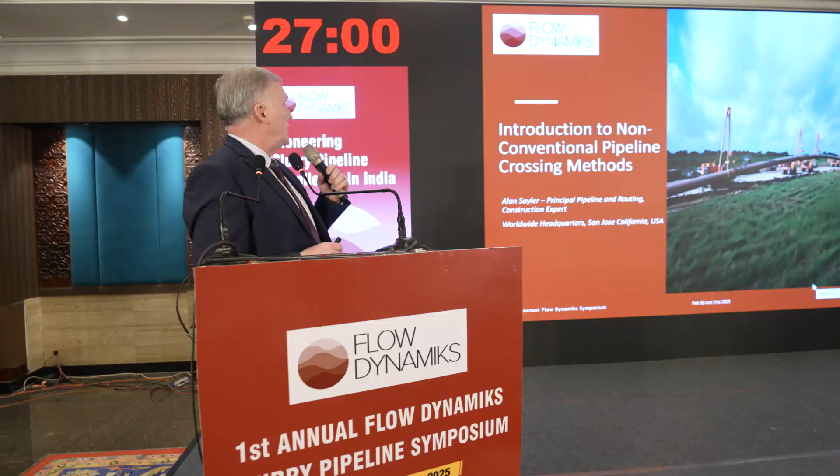Good afternoon, everybody. I know you want to get out of here. I'll try to make this as quick as I can. I'm slated for 27 minutes, I guess.

So I just wanted to share about some crossing methods that are non-conventional to regular normal construction. We have people in here that have been using these methods on their projects. We have people that haven't used them before or don't know about them.

Raj asked me to share about non-conventional construction crossing methods for pipeline installation. I've been doing this kind of work for many years, and really in the industry nothing's changed on how these methods are done, other than HDD and some of the other newer technologies that aren't really being used for slurry pipelines but are being used now. So I just want to go through this and give you an idea of what can be done and what you guys are already doing.

First of all, I'm going to talk about crossings in general and some of the requirements. On a pipeline project, it depends on how long the pipeline actually is. It all depends on how many crossings there will be.

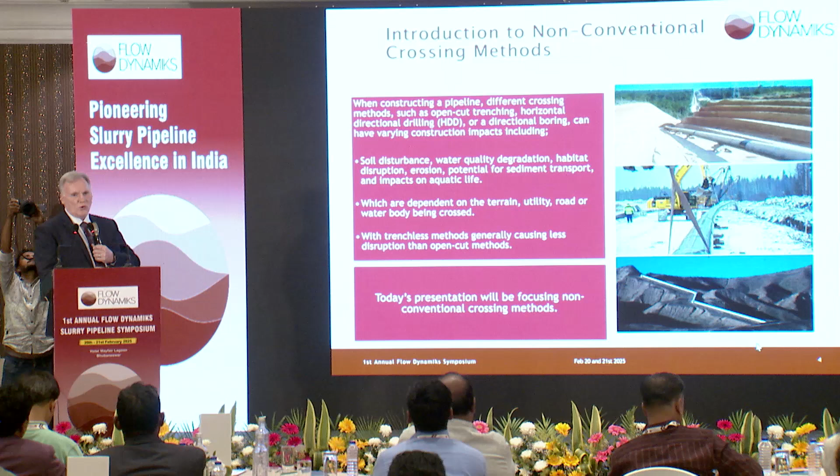The reason non-conventional crossings really came into existence was because of the impacts to the environment and the soil. Different things have evolved with environmentalists. Things have changed drastically on how we install pipelines on crossings.

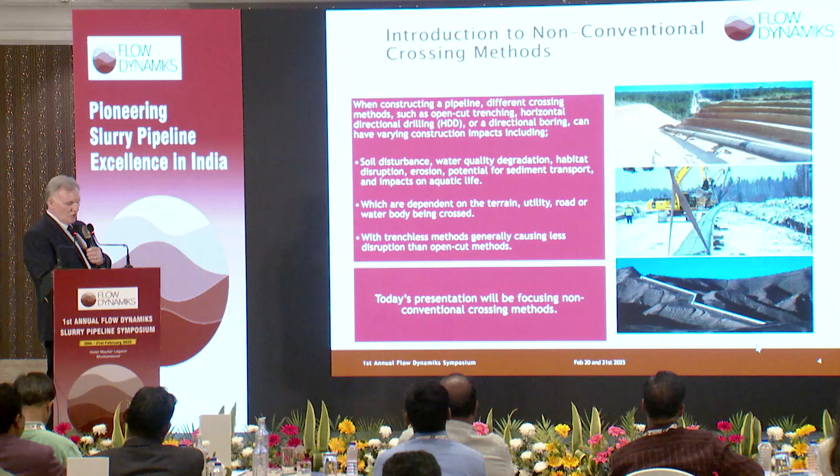Trenchless methods are less invasive compared to the old open cut crossings.

But first of all, on any project, there's a lot of planning, right? So depending on what you're doing, the first thing you want to do is investigate on desktop. I discussed this a couple years ago about investigating your project, but you have to understand your crossings. You have to get a number or list of crossings. You have to understand what they require, whether they require permits, what kind of roads they are, what kind of load restrictions are on them.

And the design is critical. Also, get out and do the survey of these crossings for elevations and profiles. Definitely the geotechnical information should be obtained before construction starts to understand what kind of problems you're going to have with construction installation.

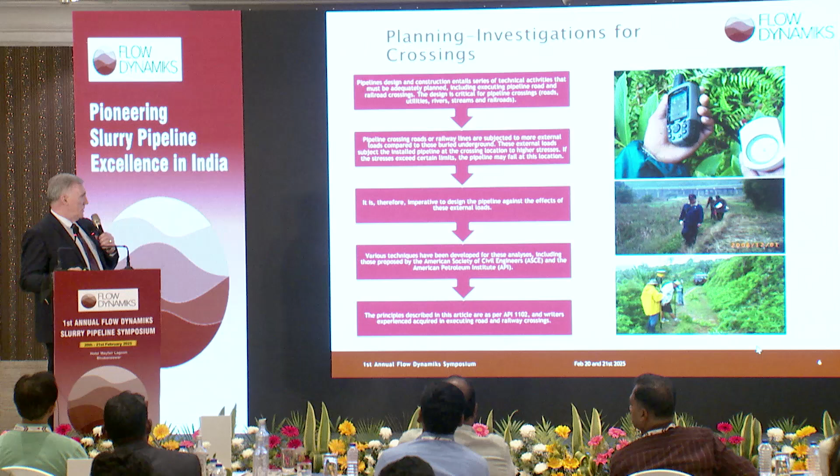So the design and construction details are very critical. The understanding of what the contractor is going to be working with can be normalized in front-end planning during detailed engineering with geotechnical investigations and understanding water crossings, road crossings. So it's very imperative to understand your design requirements and the engineering requirements so you know how to design the pipeline.

So the basic principles for road crossings follow API 1102 and also analysis developed by the ASCE.

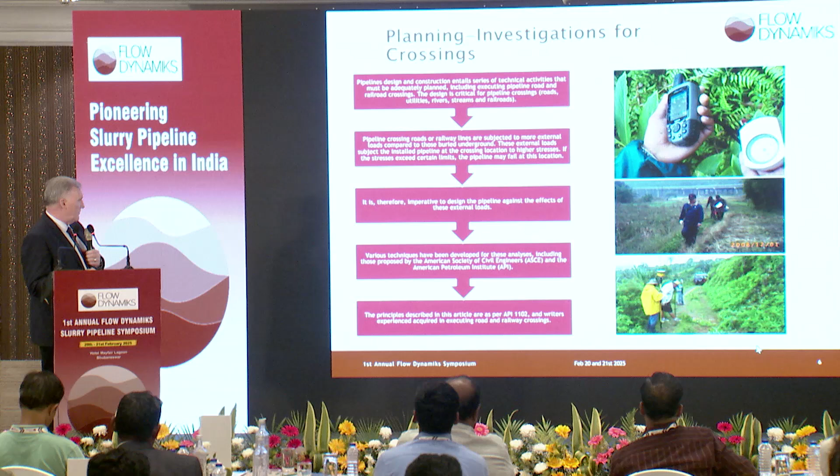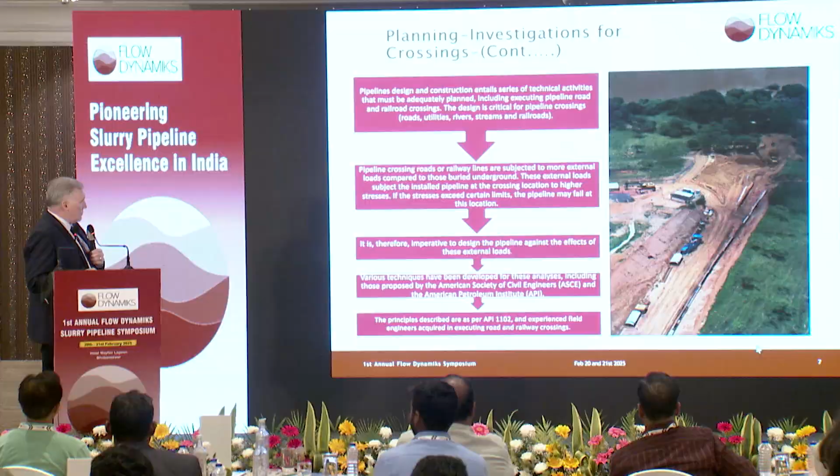There's all kinds of road crossings, railroad crossings, and they'll depend on how you're going to cross them. Basically what it comes down to is what kind of permit you have to have. A lot of railroads require permits with casing. Some highway crossings require permits. Your rural roads usually don't require permits unless there's a special reason that they're being used for. So external loads are a big issue for pipelines, and that's where sometimes casing has to be used.

During construction, you're going to definitely run across pipelines that are going to cross your railroads, river streams, utilities, major and minor roads. So it's really crucial to implement the correct methodology for crossing these with minimum impact.

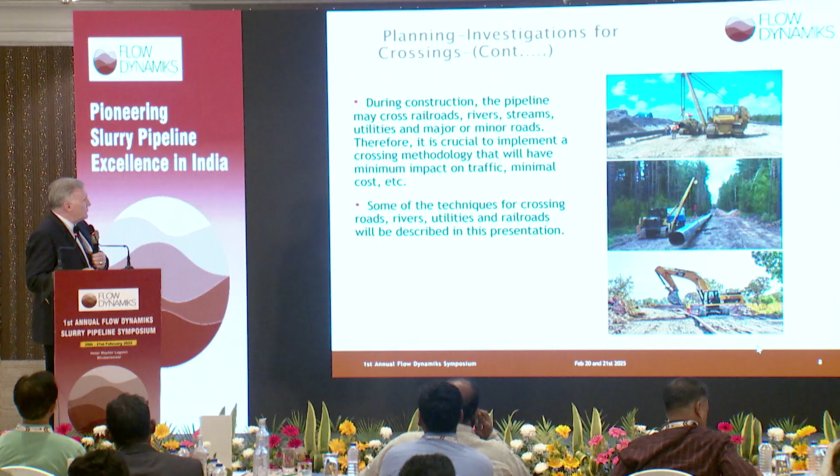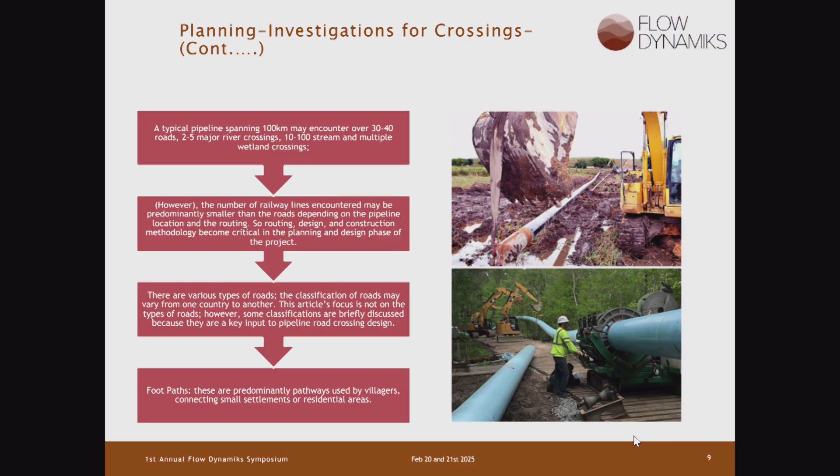I mentioned earlier, depending on the length of your project, for instance, if you have a 100-kilometer pipeline, you may have 30 or 40 road crossings. You may have 10 to 100 stream crossings, wetland crossings, whatever. I'm sure that some of you have encountered more than that on your projects here in India.

Railroad crossings are typically fewer, but they're still difficult. Classifications of roads depend on how many lanes they are. Also, footpaths—you have to keep in mind footpaths that people use. Doesn't seem like a big deal, but in some countries it is a big deal.

This just talks about roads, what type of roads and railroads that you're going to deal with—different various railroads with 1 track, 2 tracks, depending on where it's at. But you guys will encounter these, and you want to be able to use the right methodology to cross them.

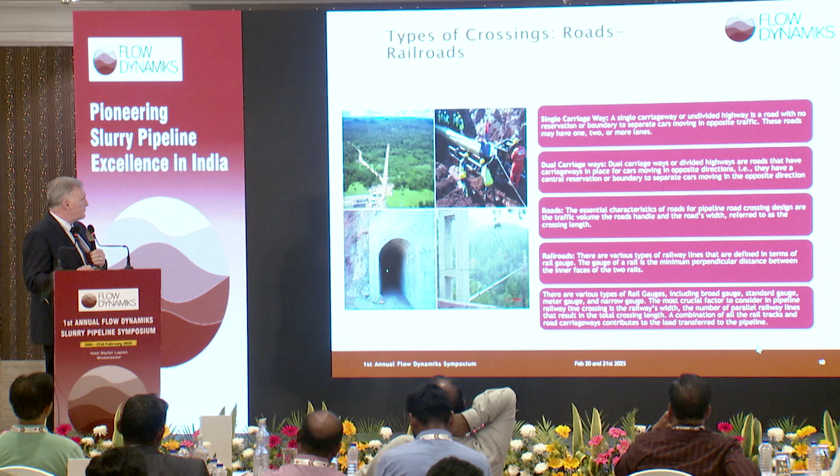So that's why most contractors, most engineering firms, most owner-operators would sooner directional drill this than open cut it, because of all the issues related to the restoration of the right-of-way.

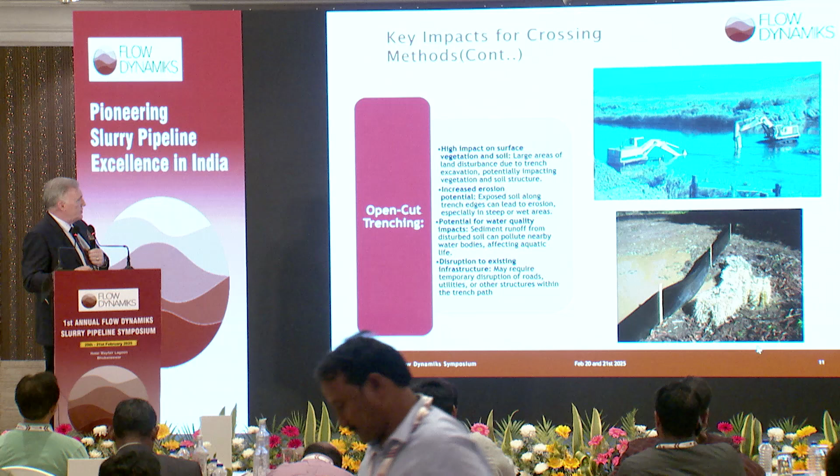Also back then, geotechnical data wasn't that available, so basically they would just blast it. If they run into rock, they just blast the river. I'm sure there are some river profiles where you can still do this depending on the profile itself. So these are high impact issues for erosion, vegetation, water quality, and the infrastructure around these crossings.

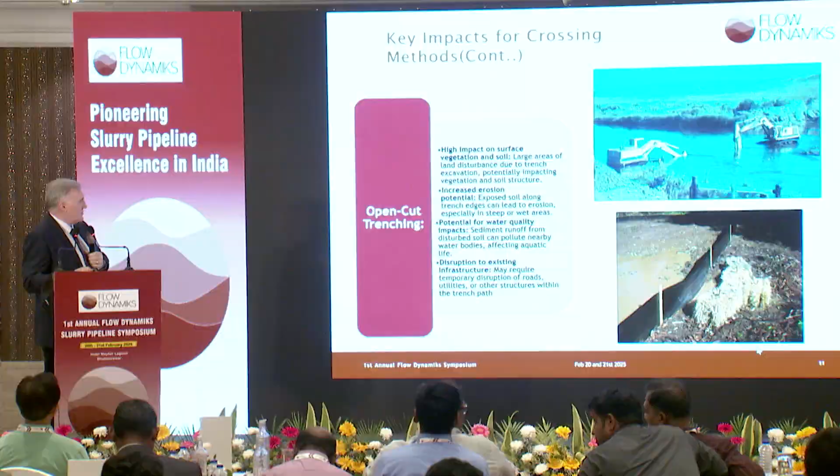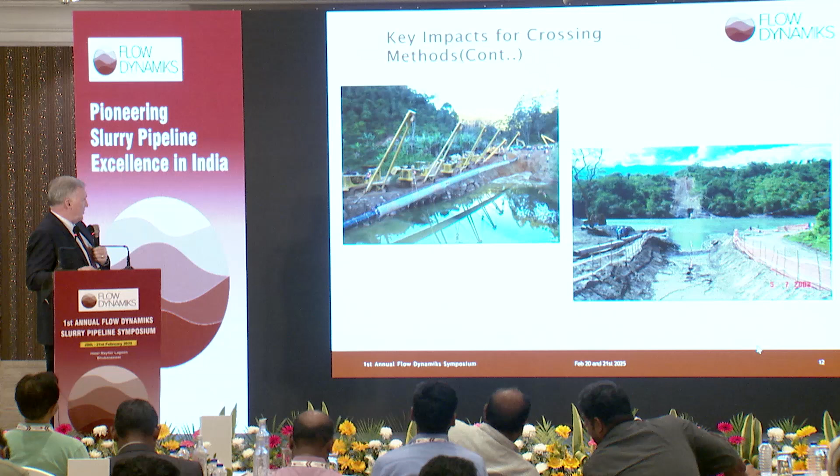Here's a good example of an open cut profile that I'm sure they spent a lot of money restoring. There's also a section of pipe here with the side booms that's going to be carried in for an HDD. So there's a difference - you still have an impact. But this was a picture from Ambatovi.

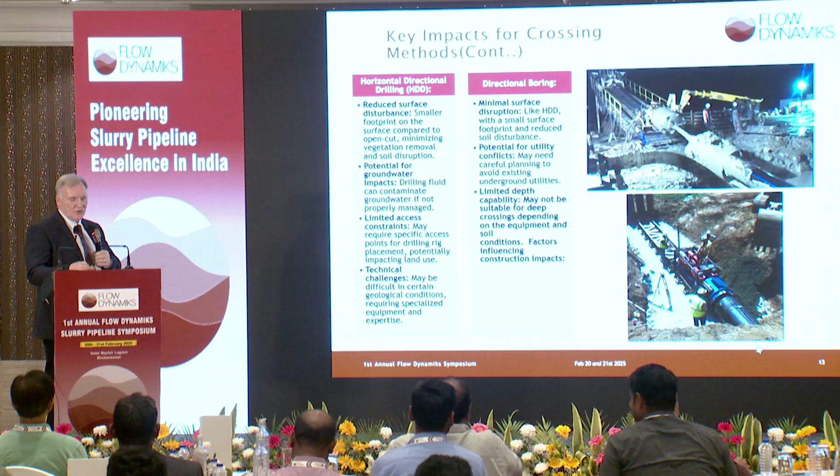So to overcome that, engineers and contractors have come up with HDD, horizontal directional drilling. Gives you a reduced surface, less disturbance, and it's actually the method most companies are using now. Also directional boring machine - small footprint - is usually used for road crossings and sometimes for railroads.

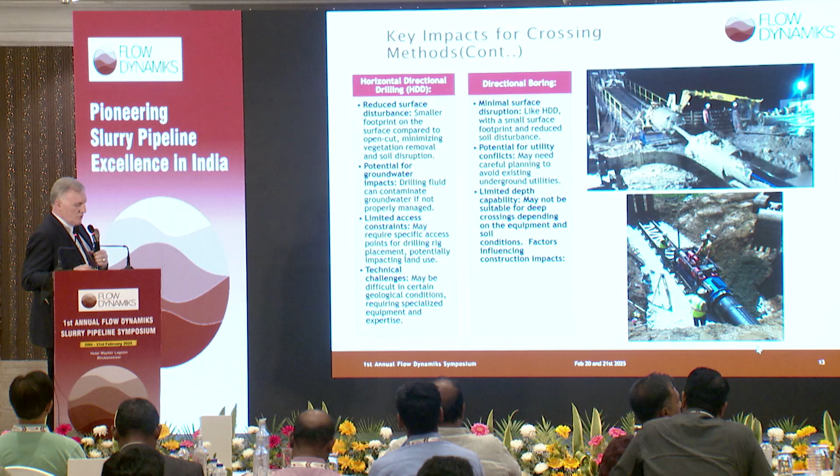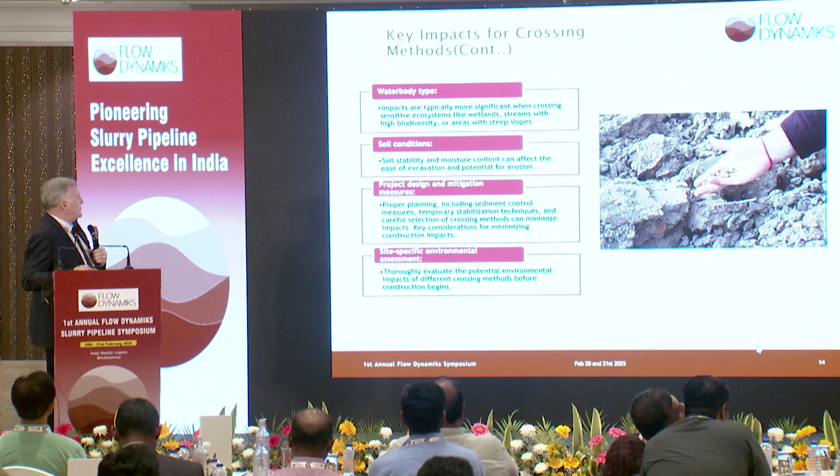So proper planning and thoroughly evaluate the potential for environmental issues - stream diversions, sediment control measures, restoration planning. These are all things you have to look at as far as the impacts for any type of method you're going to use, but the HDD and boring method are less impactful than open cut.

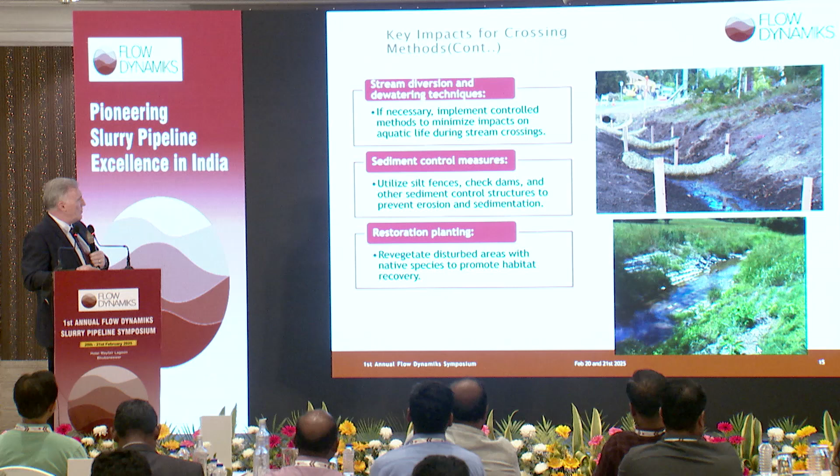I know there's a lot of cased crossings in this world. I've worked on many pipelines that after a few years, if they weren't installed properly, the casing seals short out, and then you have a corrosion problem on your casing seals. So I'm not a fan of cased crossings. I prefer slick bores without casing, but once again, it depends on your permit.

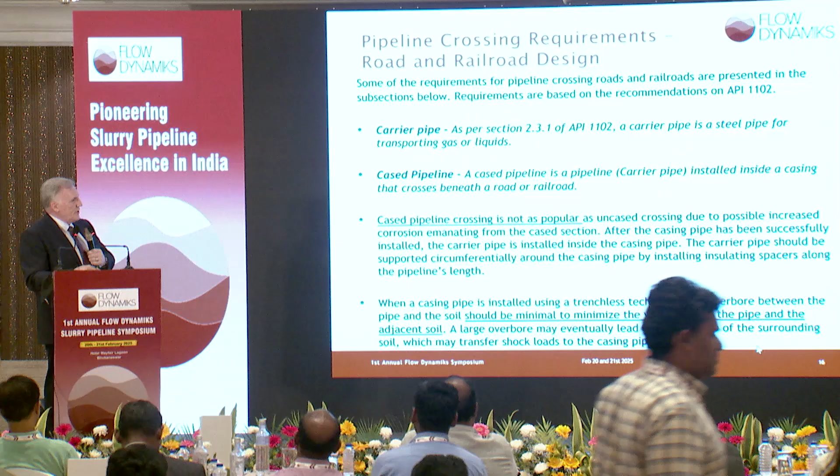So my advice to any engineers is try to design without casing if possible, because as an owner-operator, you have to maintain that system, and once that casing seal shorts out, you have to shut the pipeline down after a few years because you know you have corrosion starting.

Casing pipe - you don't want the overbore on casing pipe to be much bigger than the casing itself, otherwise the road's going to cave in or the railroad's going to cave in. So it's very critical on bore crossings to make sure you don't overbore the road crossing or railroad.

I had a personal experience on a project probably in the 90s where we had a dual 25-mile pipeline in the same trench, and we came to a railroad that had a grade of about 3 to 4 meters high. The contractor - I was gone for a week for a meeting - but I came back and they had finished it. Two days later, after I got back, I got a call from the right-of-way agent, said the railroad called and said...

...the ground is settling where the railroad bore was done. I said, how can that be? And sure enough, I went out there and got on top of the railroad, and there's a hole this big, and you could look down and see the casing pipe.

What the contractor did was a combination of two things. It was a poor design by the engineering company - they should have never done a dual pipeline in one casing. They should have done separate and smaller diameter casings.

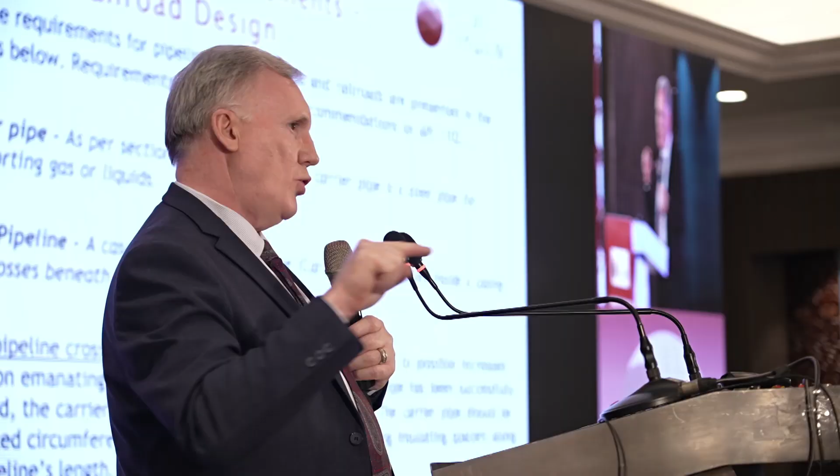But they installed this bore, and while boring it, they were pushing just as fast as they were augering, and basically pushed the dirt out, and it caved in. It was a major railroad, and it was shut down, and we had to repair it - a combination of the design and the contractor not performing properly.

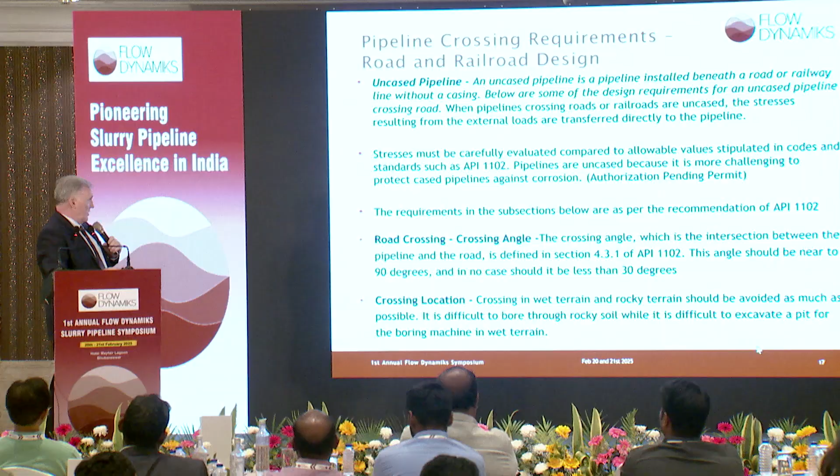Stress is a big deal for pipeline crossings, evaluated by our engineers when they design this. It depends on what's required. If a permit requires casing, that's what you got to do. The angle, crossing angle per API 1102, and crossing location depends on where it's at.

Try to locate a place where you have a good profile, away from rocky terrain and standing water if possible.

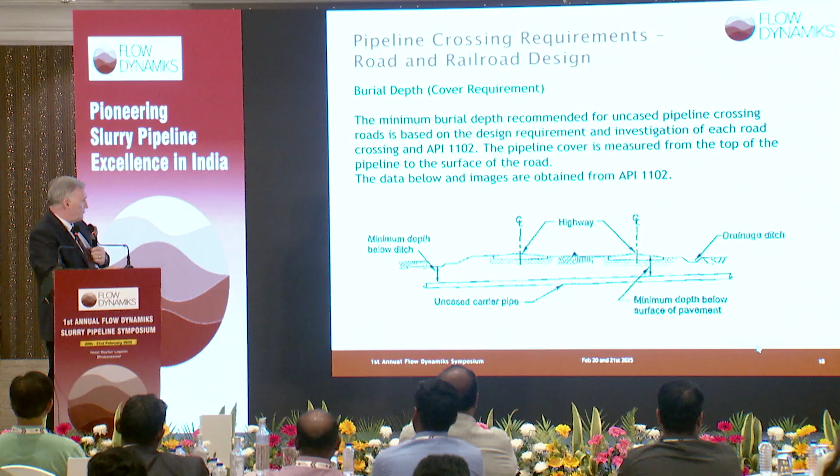This is just an example of the minimum burial depth according to API 1102. You've got your borrow ditches on each side, and that's where your minimum depth comes from. This is the requirements according to API 1102.

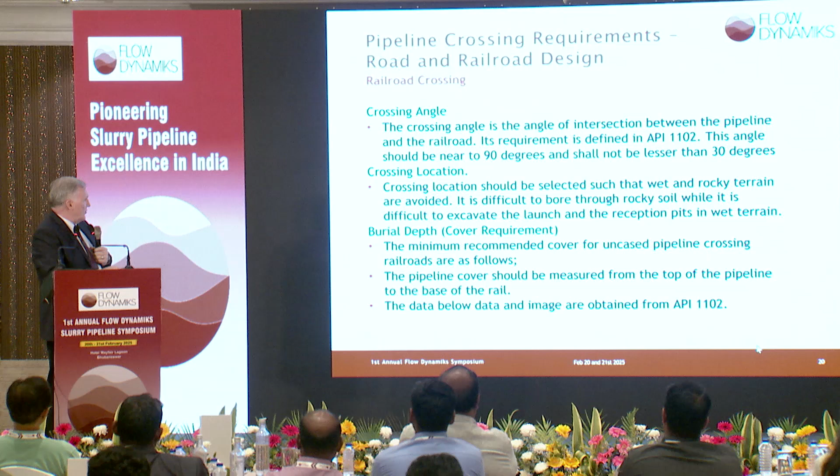Once again, crossing angle, crossing location, and burial depth are very important when laying out these crossings, either a cased or uncased crossing, railroad or road. These are the things you should be doing in your upfront planning during basic design. Get out in the field, investigate every one of these, take an inventory, and get a tally on which type of crossing they should be. Then engineering will figure out what's required for permitting.

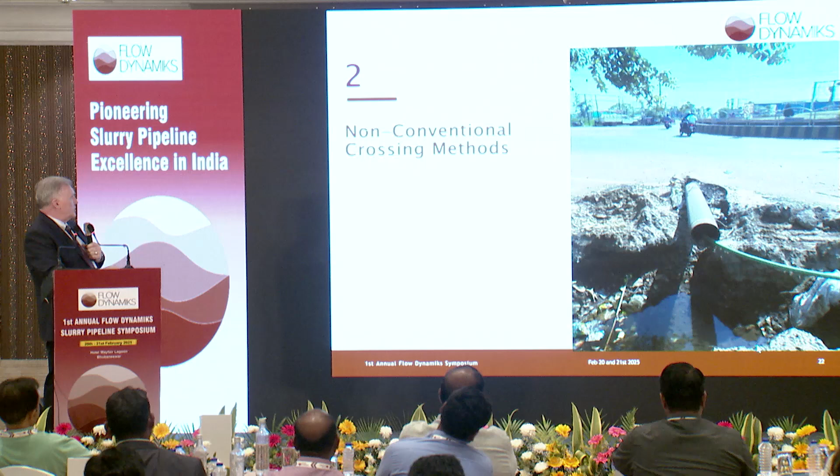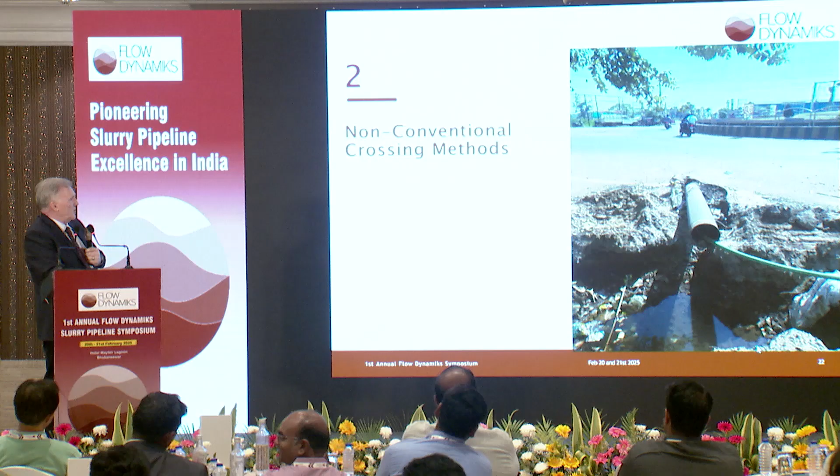These are the non-conventional crossing methods we discussed a bit about, but this picture is a crossing I came across in India a while back, and it's basically a failure based on I don't know what happened. I had nothing to do with it, I just saw it. I've never seen an HDD come out at the edge of the road, sticking up out of the ground. I thought it was kind of unique, never seen anything like this done before. So once again, this is bad planning, bad engineering, and a bad contractor who evidently didn't have a clue what he was doing. This is what you want to avoid.

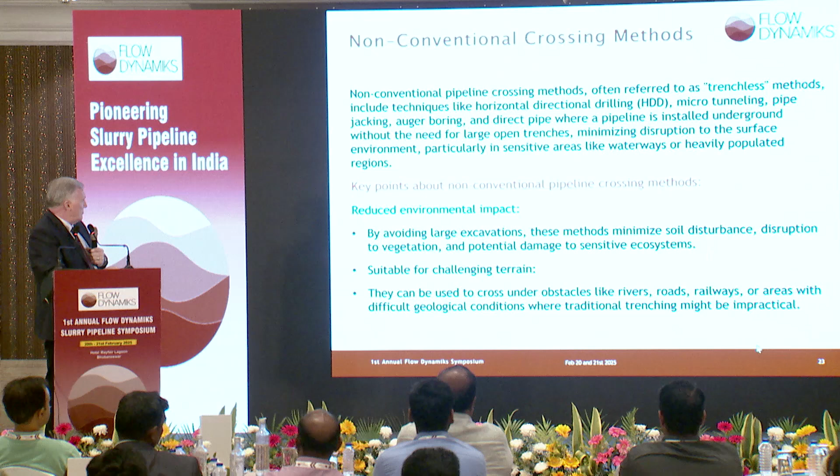The key points about non-conventional or trenchless crossing methods include horizontal directional drilling, microtunneling, pipe jacking, auger boring, or direct pipe. Some of these you'll never use. Direct pipe, most likely you'll never use, but there may be some day when it's one of your only options. Microtunneling, same thing, but your HDD and auger boring will be your main crossing methods. Once again, they reduce environmental impacts.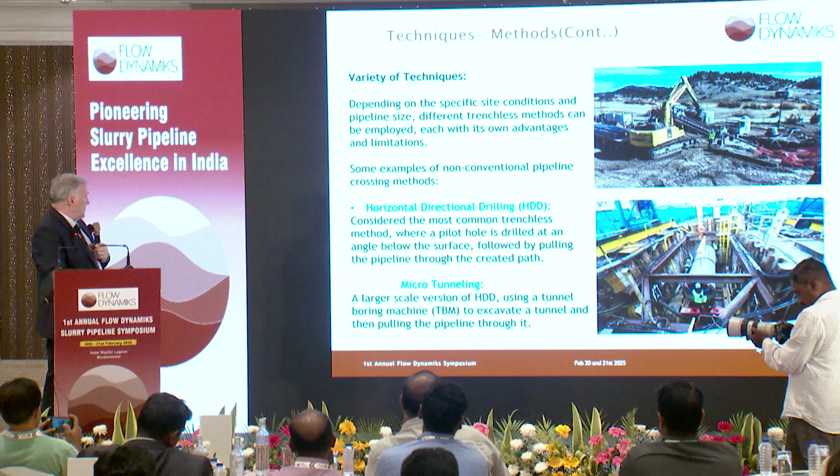Some photos of horizontal directional drilling setup and microtunneling.

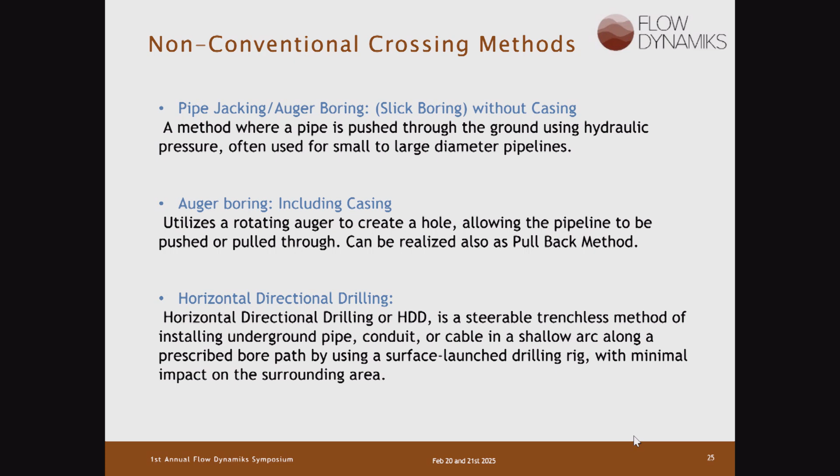Pipe jacking, auger boring, or slick boring without casing is a method where the pipe is pushed through the ground using hydraulic pressure. Often used for small to large diameter pipelines, and this is something a lot of you guys will be using—auger boring with casing and horizontal directional drilling.

I can just give some short definitions, you can read them: moiling and direct pipe.

Moiling—I'm not a big fan of it, just for the fact that in the past we put it in our project specifications that we would not use moiling because of the impact it has on schedule. If the ground is sandy soil, you'll have problems. What happens is you start hammering, vibrating, and if the soil is sandy on road crossings, the pipe will get stuck and you'll never get it out.

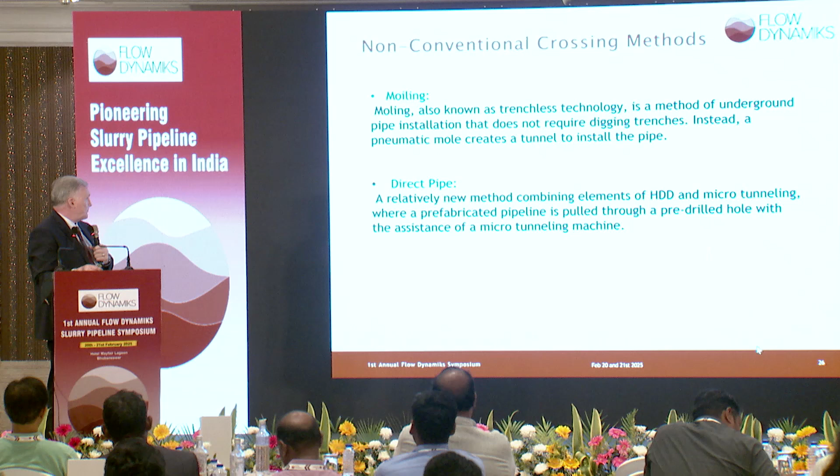We had a project one time, and that's the last time I ever saw moiling used on a project I was on, because we wouldn't allow it after that. The contractor had a small diameter 12-inch road crossing out in the middle of nowhere, and instead of taking 1 or 2 days to put this crossing in, it took them a week because they got it stuck. The more they hammered with the sandy soil, the tighter the pipe got, and it took two D8 dozers to pull it out. The next day they got a permit from the county and open cut it, and were done the next day. So moiling is really a good method if you're doing utility work, in my opinion.

Auger boring machines—this is just a definition on how you set them up and what the capabilities are.

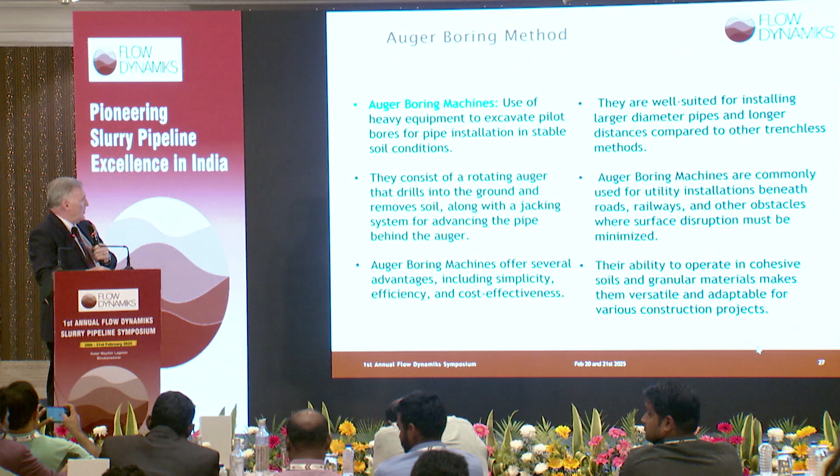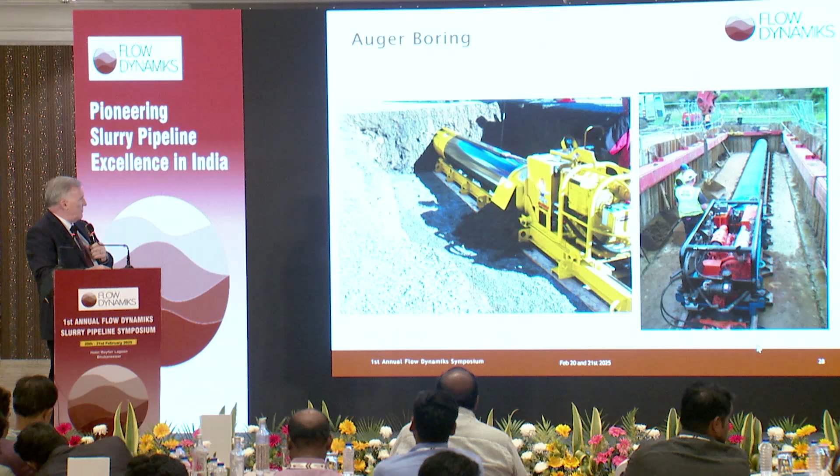You'll see this type of boring machine is very common about anywhere you go. They're very accurate, both on how straight they are and the depth, because you're lining it up to your survey, where your entry and exit should be, and the elevation should be the same on each side when it comes out.

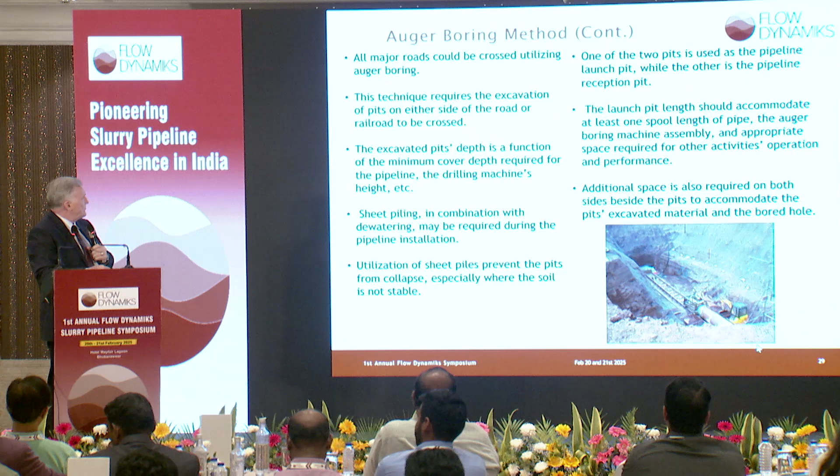Slick bore method or case bore—two different methods. Like I said before, I prefer slick bore with no casing. You're basically just augering in the pipe with the right type of coating on it, and you don't have to worry about casing or casing seals. It's suitable for stable, cohesive soils. I've never had a problem with a slick bore.

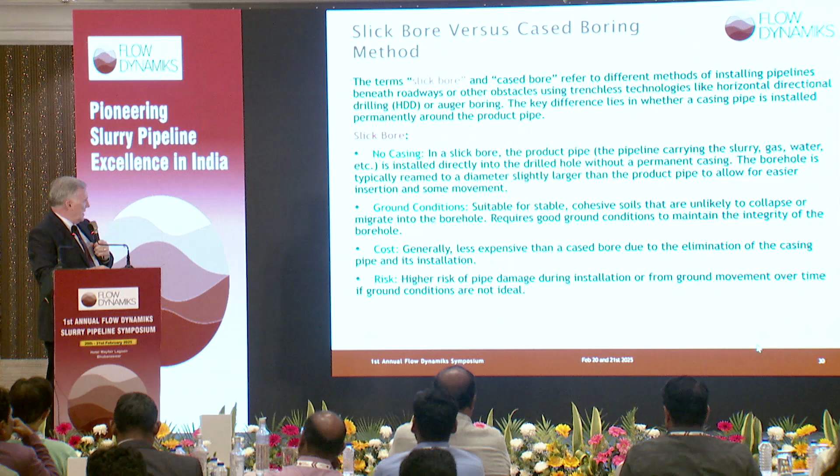It says at the bottom, higher risk of pipe damage. This depends on how the contractor is handling it, and what type of coating that you have designed for the pipe.

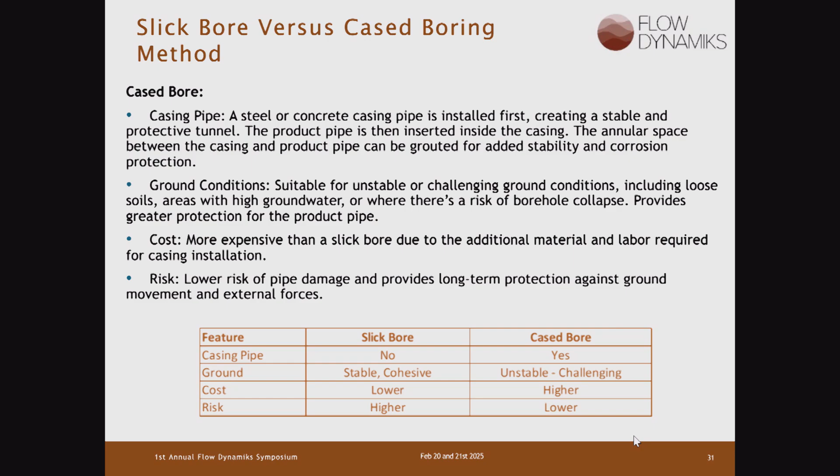Slick bore versus a case bore. Slick bore, no casing, stable cohesive soil, lower cost, higher risk. A case bore has casing. Ground can be unstable and challenging if you get into rock or hard soils that are hard to auger. Cost is higher, but the risk is lower.

Choice between a slick bore and a case bore depends primarily on the ground conditions and the contractor at the time. Typically in pipeline construction, you don't tell contractors how to do their business unless it's already stipulated in the project specifications or in the contract, but it's really up to them.

Engineers have to assess the soil properties, groundwater levels, and other factors. Contractors should be doing this also in the field when they get ready to do this work.

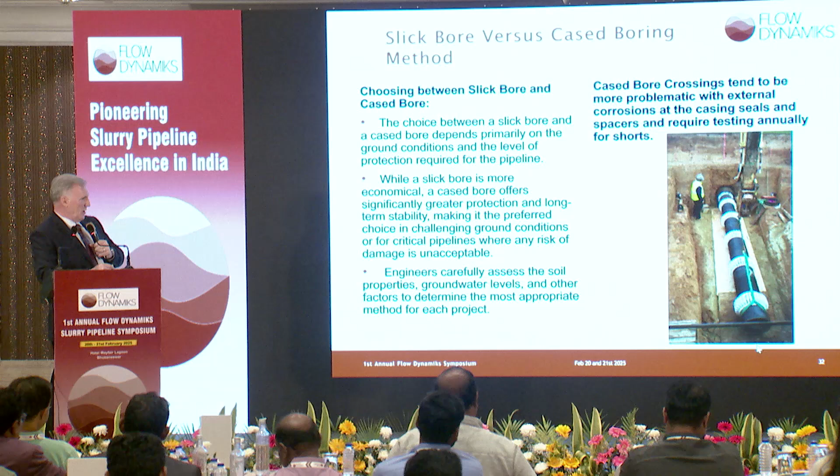Once again, case bore crossings tend to be more problematic with external corrosion at the casing seal and spacers. A lot of countries have an annual DOT inspection by the Department of Transportation, especially in North America, where you have to check these annually, and it becomes a problem if they're shorted out, because then you have to figure out how you're going to fix it, how you're going to shut your pipeline down and take time to fix it.

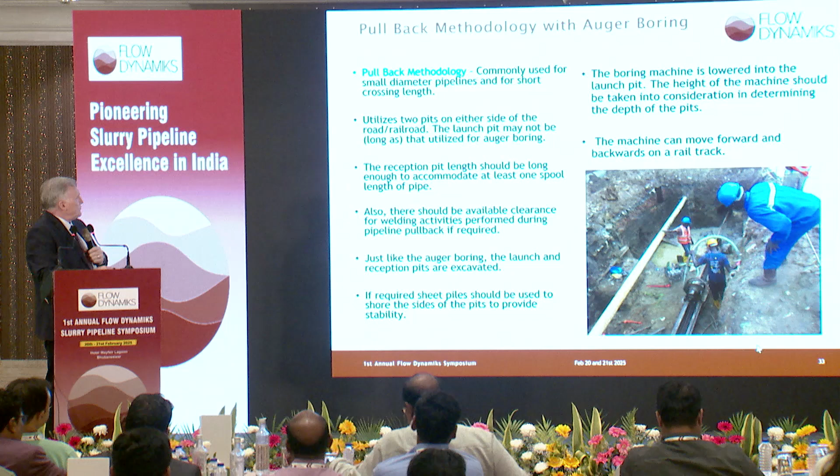I have a pullback methodology where you auger it and you pull the pipe back with the auger moving backwards. It's a technique that's not used too often, but it can be used.

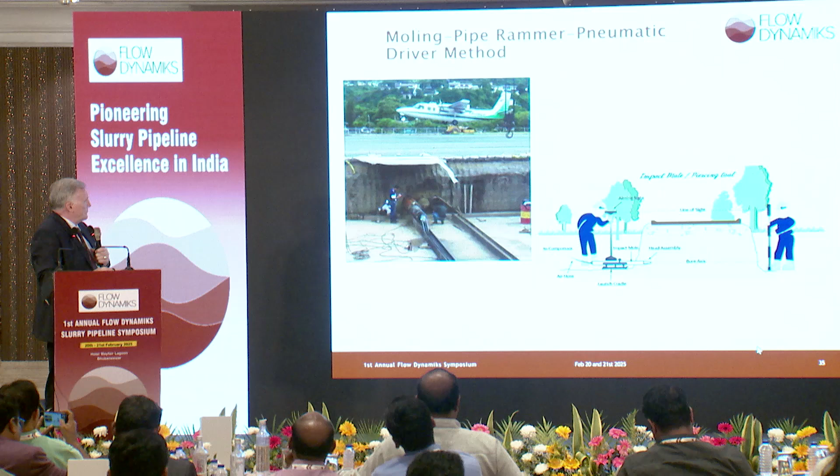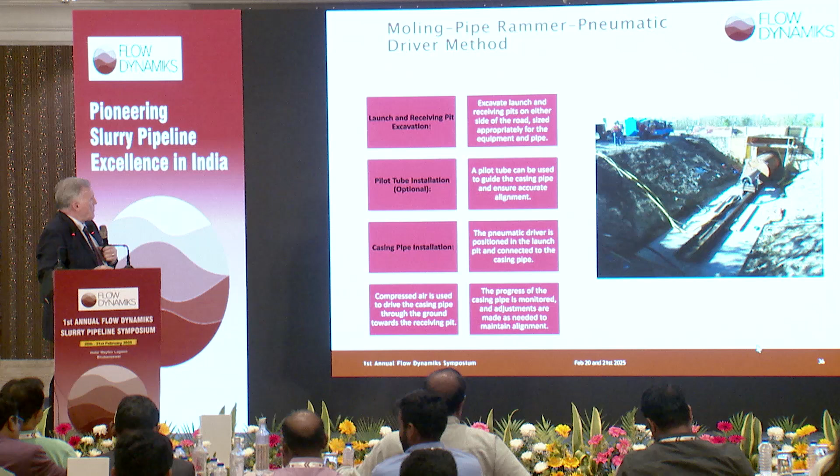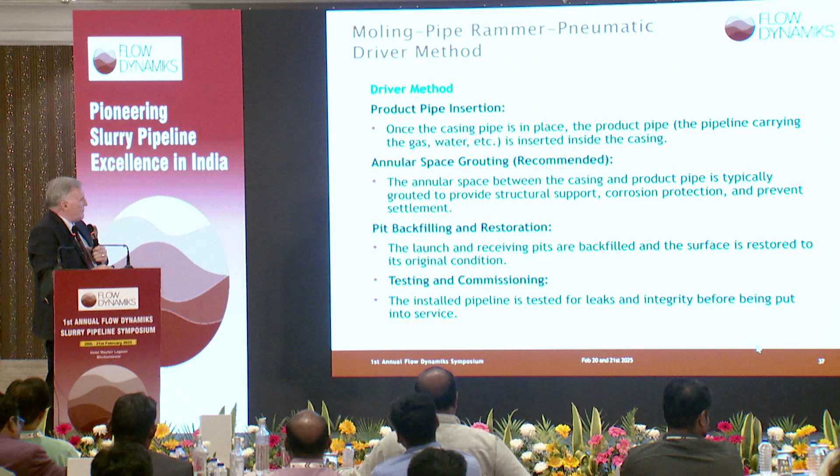Like I said, I'm not a big fan of moling, but if anybody wants this information afterwards, I'm sure Rod will share it with you, but I'm not going to read it all.

Horizontal directional drilling. Like I said, this is one of the biggest methods used in the industry, in the pipeline industry.

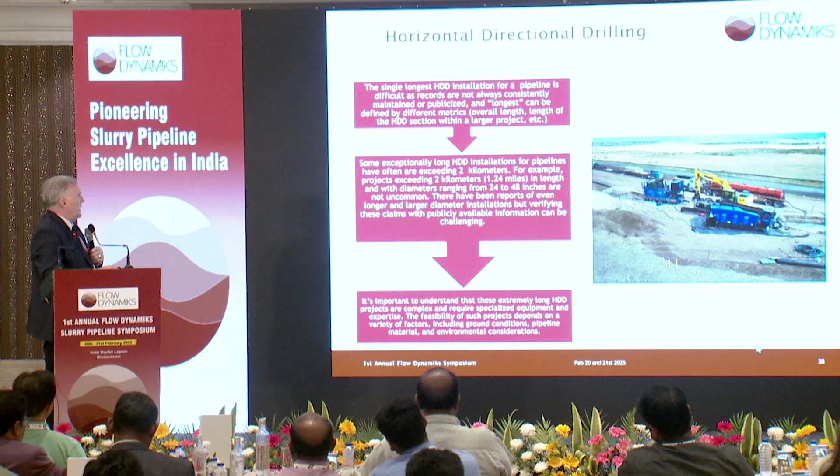Nobody knows the longest HDD ever completed because it depends on the ground conditions and the diameter of the pipe. I know some projects that I've worked on in the past, 42-inch, we did about a mile and a half of 42-inch with no problem at all. And there's other projects that have been longer than that, with a smaller diameter. I'm sure there's some longer than that here. I know in India you guys have done some extremely long HDDs also.

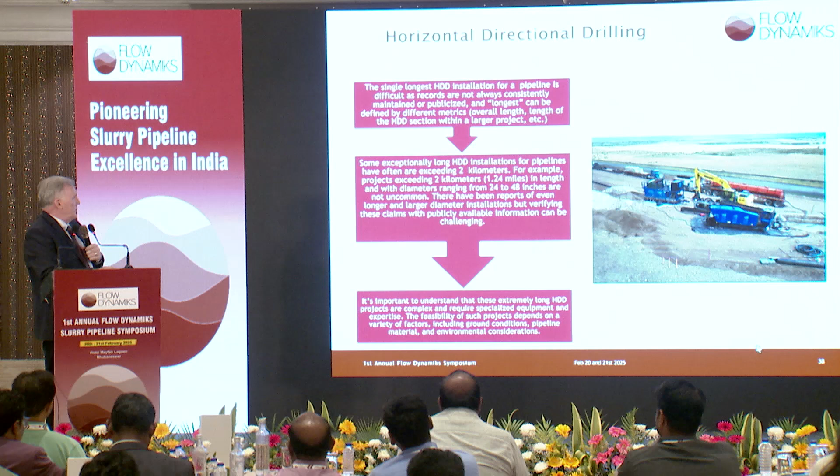Some examples. So the impact of the footprint of the pullback section is temporary. It's temporary construction. You clean it up and reseed it, replant trees, and you can't tell you were there.

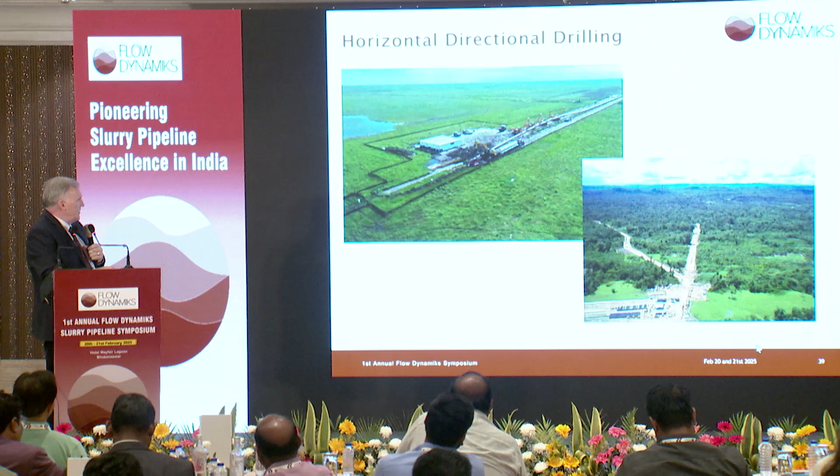This is the layout for an HDD, required equipment, basically. It's a layout, and it's very minimal impact compared to other types of construction crossings.

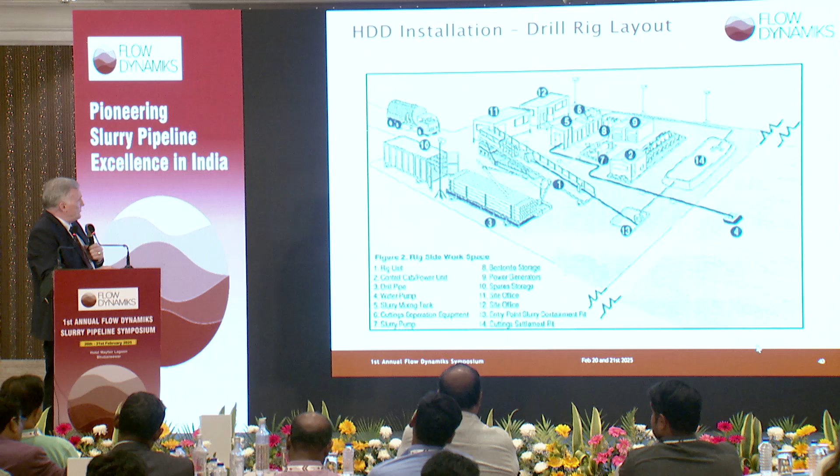So the directional drill, start out with your pilot hole, run your pilot hole, and then you start back reaming until you get to the right pipe diameter size.

Typically, the swivel attached to the reamer allows the back pull of the reamer to clean out the hole, depending on what size. For 42-inch, for instance, you'll go with a 24-inch reamer, then probably a 36-inch reamer, and then the next size reamer, like a 40-inch or something. But this is really the method that even environmentalists like, because it's less invasive.

The only thing you have to worry about is frac outs. So once the reamer's done, once you're done back reaming, then you just connect to the pullback section and you pull the pipe through.

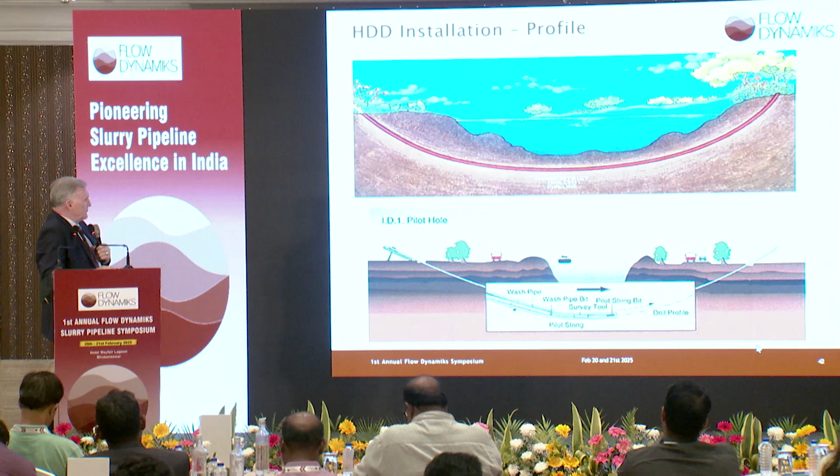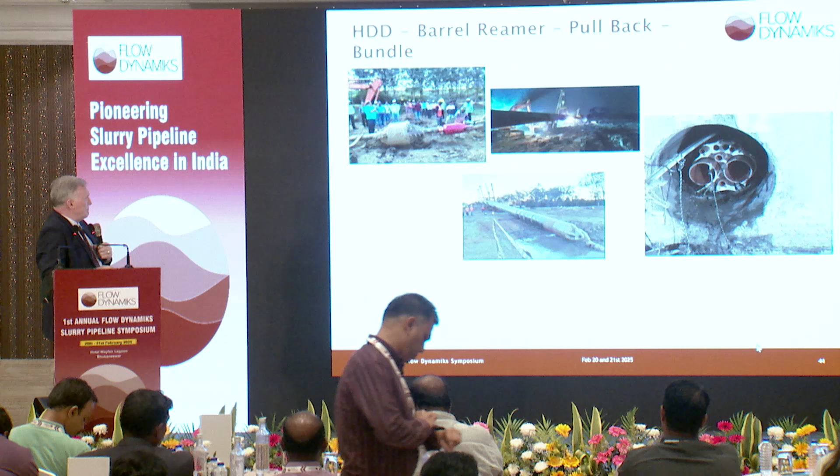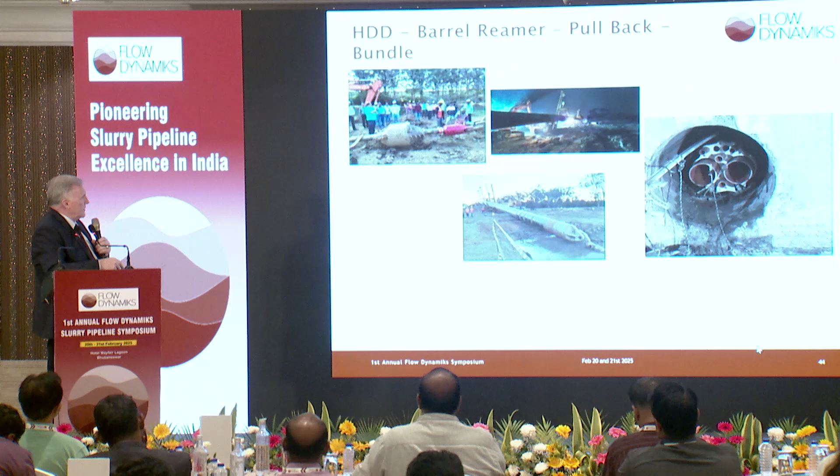So here's your pilot hole. Pre-ream, back ream. There's a picture of a barrel reamer. There's a picture of a pullback section. And there's a bundle of pipelines pulled through a crossing, just to give you some ideas.

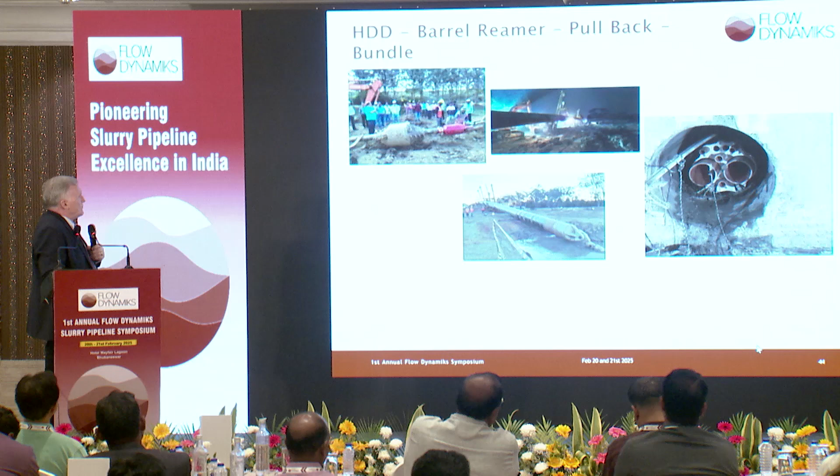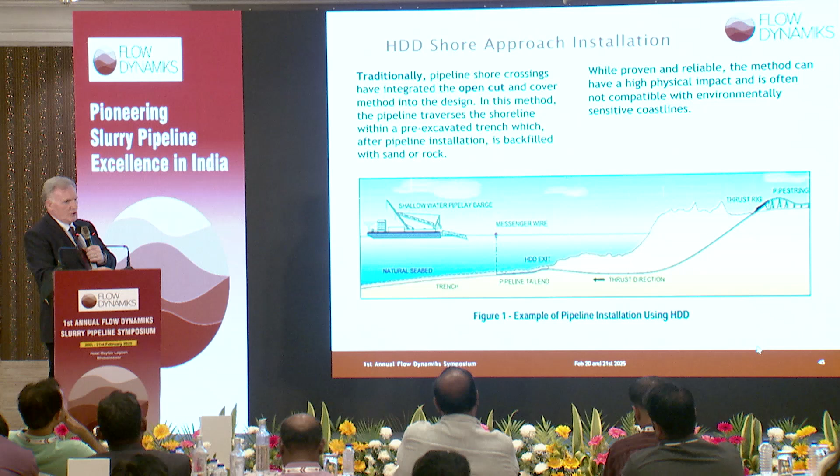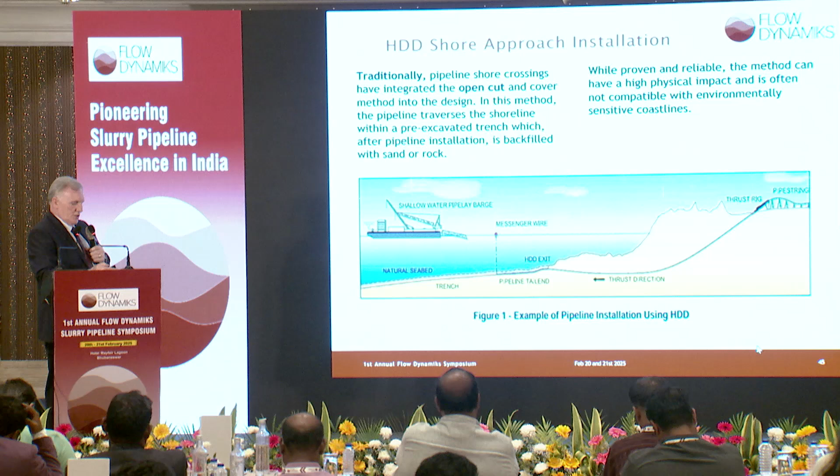So eventually, I'm assuming someday in the near future or later, there will be shallow water slurry pipelines, because you're going to run out of space, or depending on where it's coming from, it may be easier to do it in a shallow offshore pipeline. But HDD shore approach is nothing new. They do this all the time in North America and other countries. So you can either do HDD for your shore approach instead of open cut, which people don't like on coastlines nowadays. So they're using HDD to have these shore approaches installed.

You can also do it with microtunneling.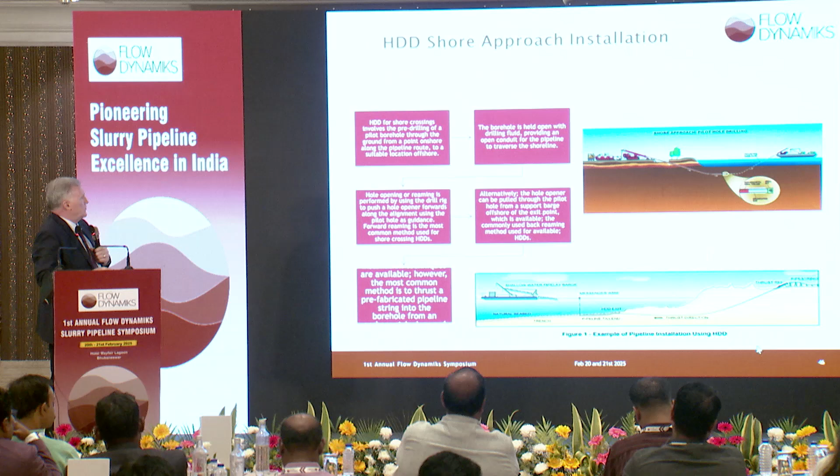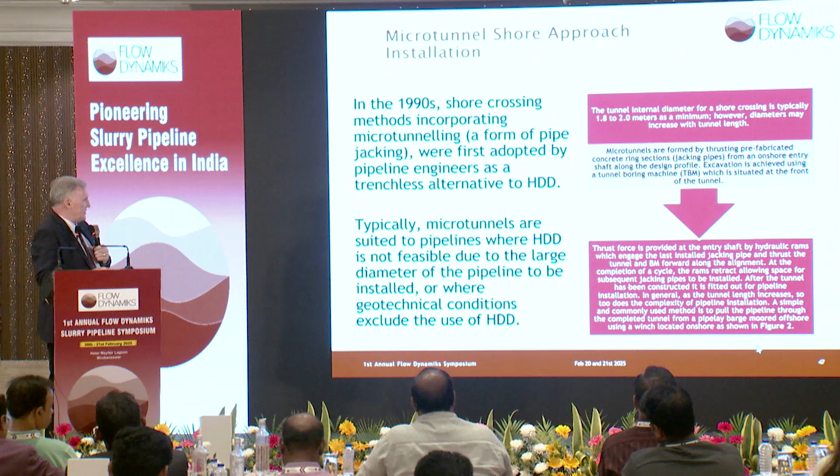Microtunneling is something they're doing instead of HDD, but it's way more expensive. Sometimes microtunnels are suited to pipelines where HDD is not feasible due to the large diameter of the pipeline to be installed, or where geotechnical conditions exclude the use of HDD, but they're way more expensive.

So this is the same thing with a microtunnel approach. HDD, or thrusting with a direct pipe, is what they're using in some offshore approaches also. They've done a lot of these in the Gulf of Mexico, or Gulf of America, whatever you want to call it. They're doing that now.

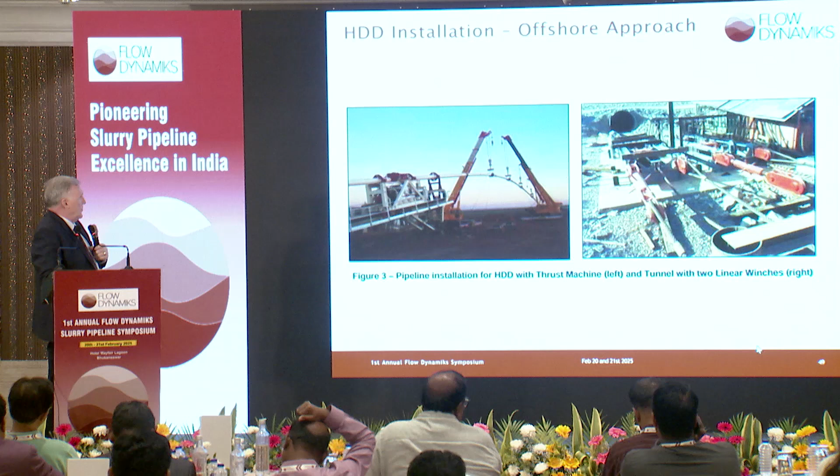Here's the advantages and disadvantages: reduced environmental impact and avoidance of culturally significant sites. There's just a lot of difference in impacts comparing HDD to microtunneling.

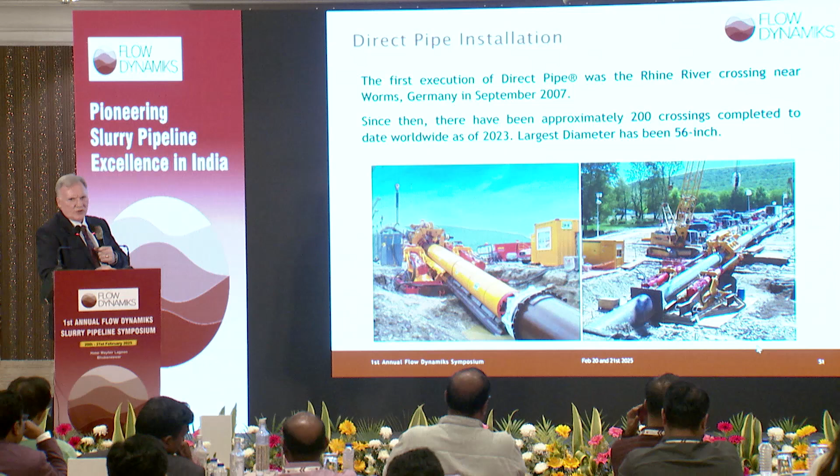Direct pipe, I'm sure you guys have read about this. The first crossing was done on the Rhine River in Germany in 2007. Since then, approximately 200 crossings have been completed worldwide as of 2023, so I'm assuming there's a few more. The largest diameter used in this method was 56 inch, but I think right now the smallest diameter you can get down to is 30 inch. So if you want to do anything smaller than 30 inch, you have to pay the price to get the tooling made, which is really, really expensive.

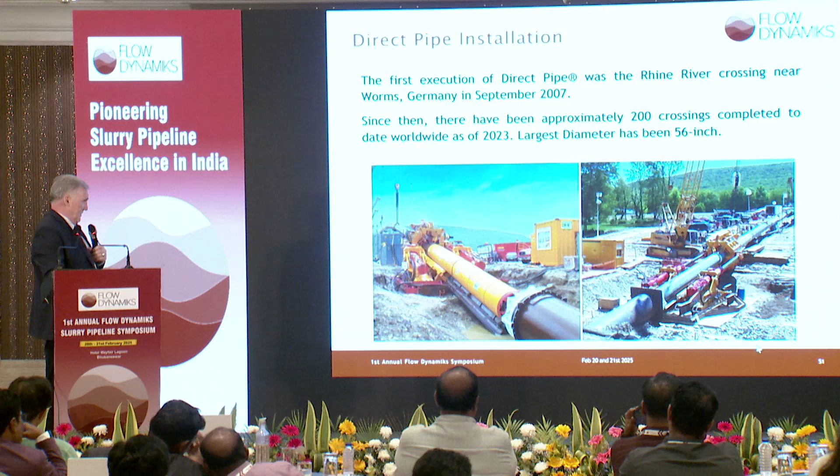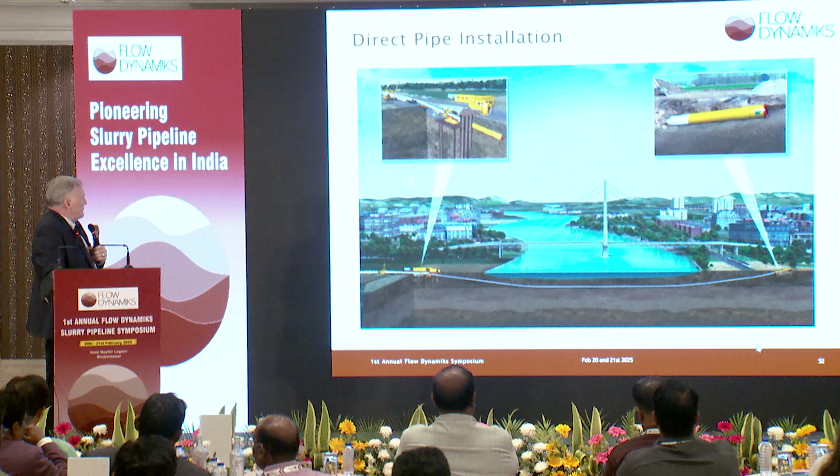But it's quite the unique method, specialized for special crossings where nothing else will work, when you have restricted areas. If you can HDD something like this, you might be better off HDDing it. If not, then you just keep doing what you've been doing to deal with it. I'm sure there's a possibility of HDDing this somehow if you find the right location for the pullback string and to set up the HDD layout itself.

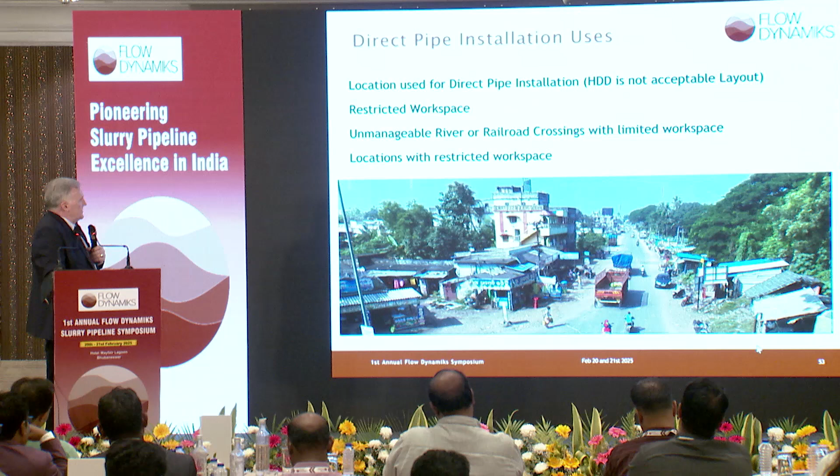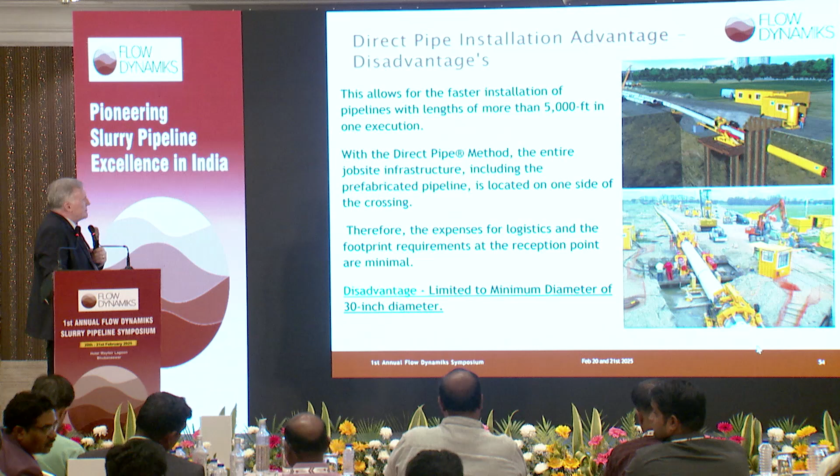Like I mentioned, 30-inch diameter is its limit. Wetlands and marsh crossings are different types of crossing methods, but I know that some projects will have large marshlands, swamp crossings, and this is a project I managed in Louisiana. It just gives you an idea of what can be done. It may be more expensive for you, it may save you time if you're in a schedule bind, but you can get the equipment, the marsh hoe, the barges, and you can quickly install your pipeline in marshes.

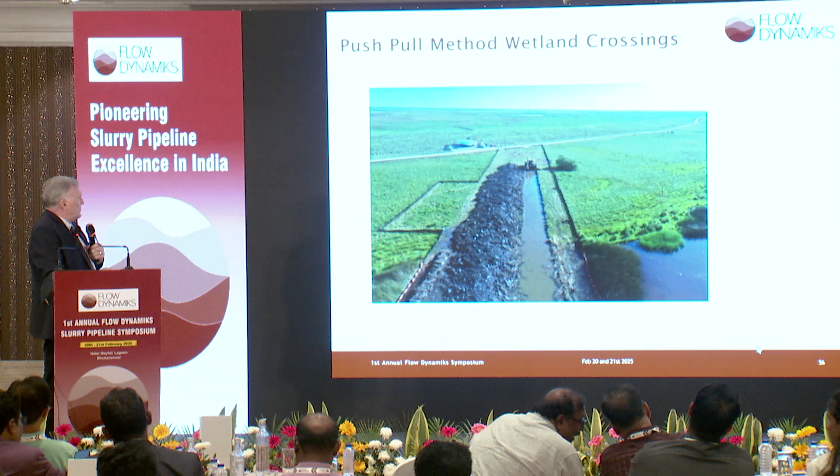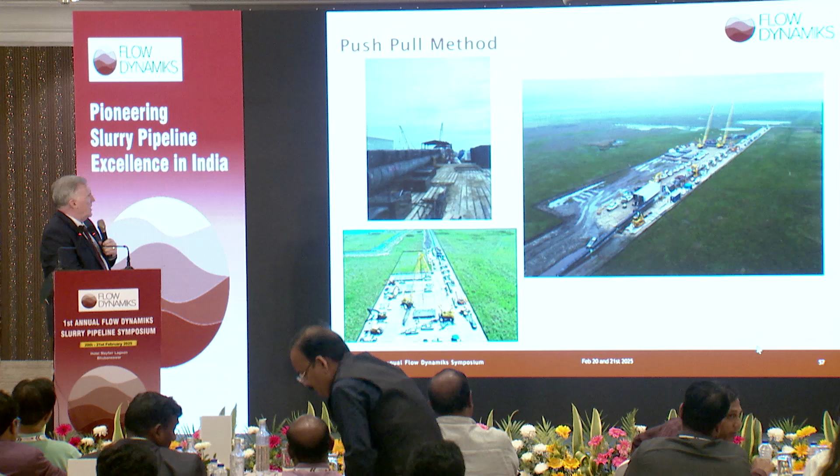I believe we were slow getting started, but we ended up doing maybe 65 joints a day at the most. But the thing about this was that we could actually get the trench in ahead of the welding, and I think the longest section we pulled was 3 miles at a time. So it went pretty quick, and it was very efficient.

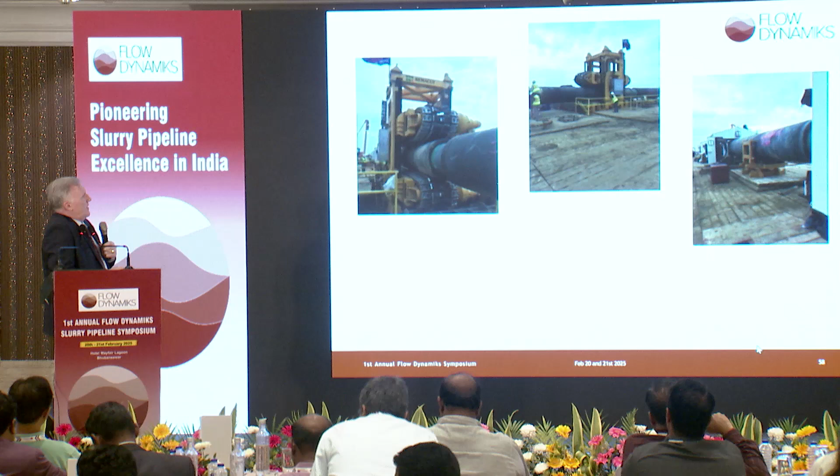We used a tensioner - I worked with the contractor. They were going to use the old conventional cable pulling method to pull the pipe, but we decided that for the project, with the issues we had with the short season due to the hurricanes, we needed to do something different. So they got an offshore tensioner, mounted it on pilings we put in the ground, and the tensioner was used to move the pipe. After the floats ran, they would continue welding and pushing the pipe out while the marsh hoe was guiding it down through the ditch. It's very cost effective. It seemed very expensive to some people, but based on the other options, it was pretty reasonable.

So for an overview, I listed some things here. Upfront planning, site investigations, routing, geotechnical surveys are very critical when you're planning your project and deciding what type of crossing methods you're going to use. The design and alignment of the site work is required, along with best practices and methods included in design and construction.

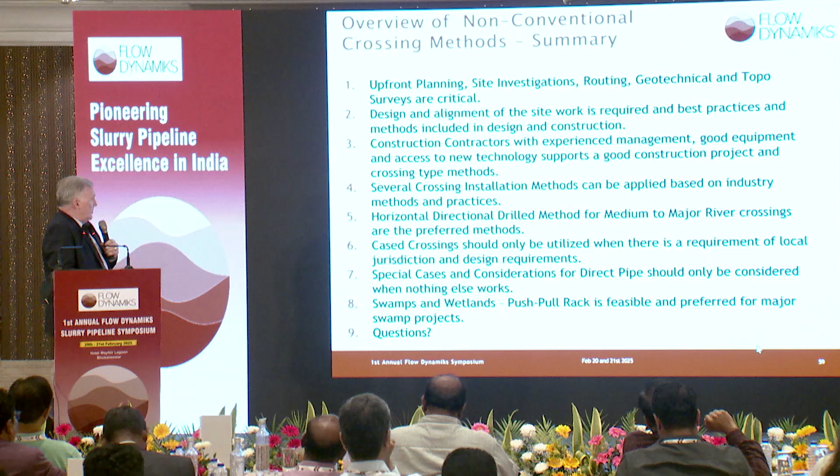I highly recommend getting your construction contractor involved in planning these, working with you during the pre-construction phase, even if the engineering is not done. Get a contractor involved even if you haven't awarded the project, to help you understand what to do. Get a good construction contractor that has experience, management, good equipment, and can access newer technology. It helps with these crossing methods.

Best practices: really what it comes down to is horizontal directional drilling is the preferred method for medium to major river crossings, where you can open cut some of the smaller crossings. Cased crossings should only be used or utilized where there's a requirement for local jurisdiction and design requirements. Special cases and considerations for direct pipe should only be considered when nothing else works. And once again, for wetlands and swamps, the push-pull rack is feasible if you have access to that equipment - you can get the equipment, and it works really well.

So with that, that's just a quick overview of non-conventional crossings, and I thank you for allowing me to present this.